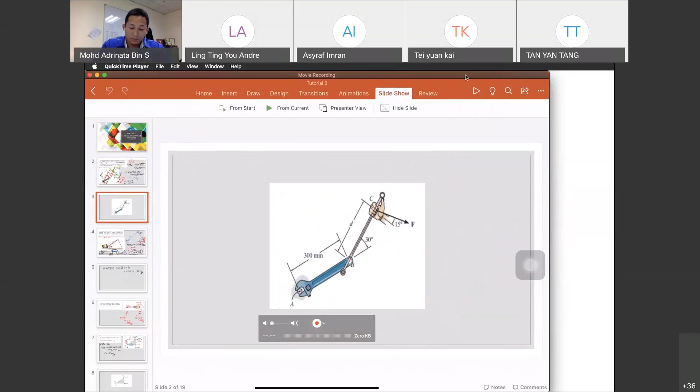120 Newton meter to tighten the nut A. So A, we have A is the nut. This is nut A, and then this is bar BC.

So the question is, where's the question? Extension D. So the bar BC, D is 300 mm. Determine the required force F in order to develop this moment.

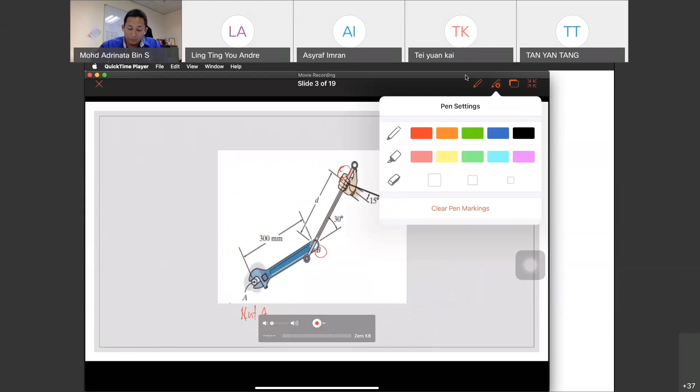Now what do you need for your moment? Your equation is M equals F times D. So you need the moment.

This is from the question, clockwise direction. So for clockwise direction, we just give it negative, because we assume that counterclockwise is positive. So this is moment, you have the moment, and F.

You have the F, but you need to separate the F. So there is your F, and then you need to find your D. So you have your F, but in F format, F1, F2, F3, okay?

And D, distance. So you need the distance. And F times D must be perpendicular, 90 degrees.

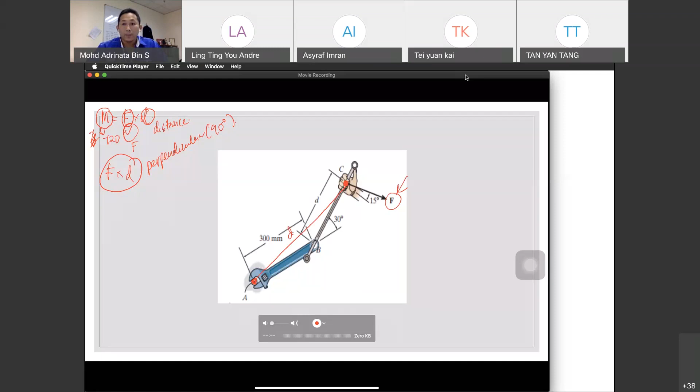From that, you need to find your D. How to find your D distance, and this is your point C. The first one, if you have an idea, from point A to point C, okay, that's the D. But what about our F, theta?

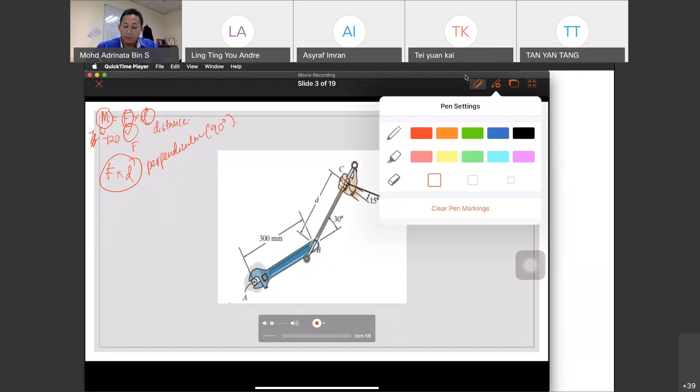Theta is not 90 degrees. Right, so they gave you from the equation, from the figure, this D, okay, D is from here, from B to C, that's the D. So you need to find the easiest way. From this question, you can use your point A and find the perpendicular.

For this F, we divide it because it is 15 degrees there. This is first one, and then we have the other point for C. So that one is our break of point, sorry, force.

So from that one, you can try to find your D, but it is not at point A. So we need to define our distance. Remember, distance must be 90 degrees.

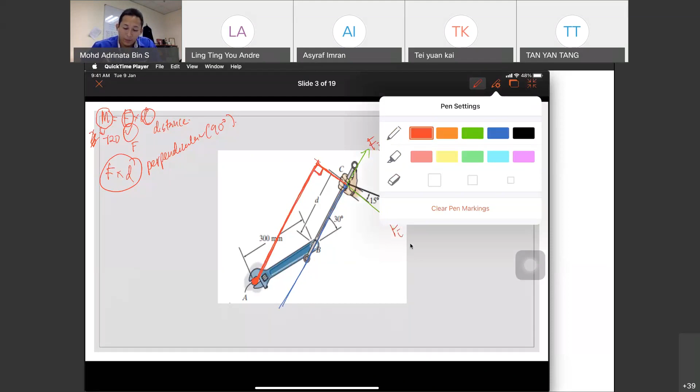So it is the line for Fi that is perpendicular. What happened to our Fj? For Fj, this is the line of force. And what is the distance that is perpendicular to our A? This one. So this is for dj, and this distance, the red one, is for di.

Okay, that's the first one. So you need to find the perpendicular. Okay, so this is dj, this is 90 degrees, and this is your di. Okay, so this is for Fi. So this is 90 degrees. So you have two distances.

Okay, di and dj. So you need to find di. What is di? Okay, so we separate our line. Okay, for the distance we have, this one is one thing. Okay, so this is D, rectangular, so this is D. And the other one is, we have this one.

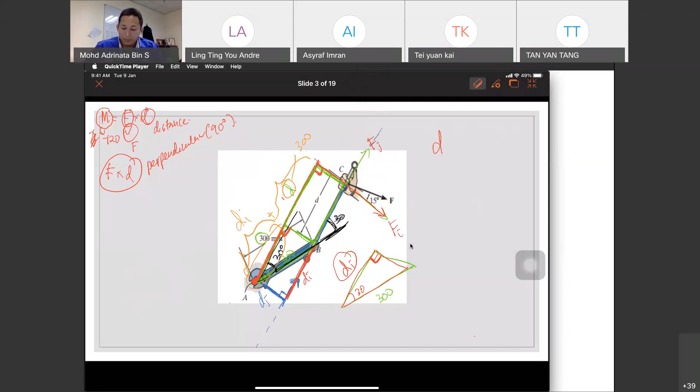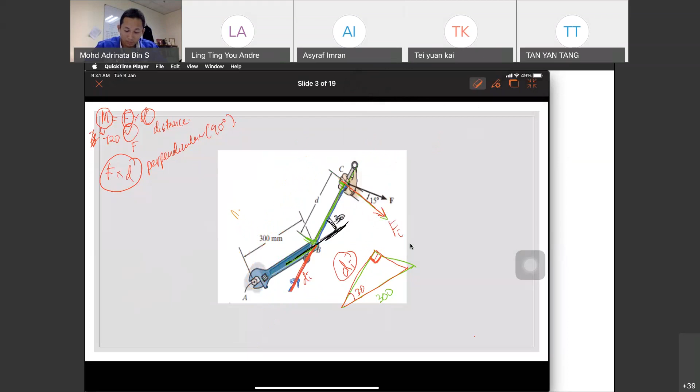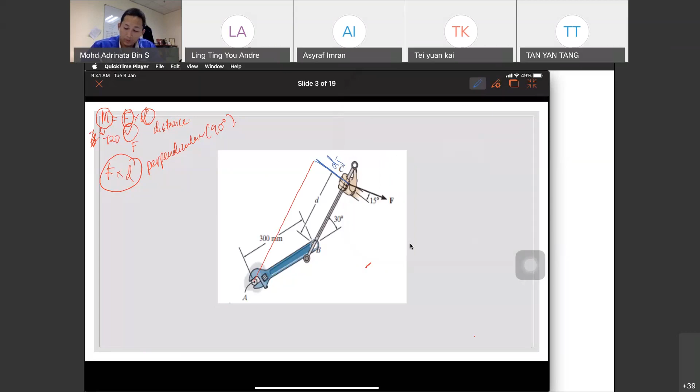Okay, after I explained that M is equal to FD, okay, so we want to find our D, okay, this is for D, this is for DJ, the distance for DJ, and this is for DI. DI is equals to D plus E.

So this one, we separate it by 2. Okay, so this is, the first one is D. D is equals to 300. And then this one, we separate it into a triangle. And this one, we have this one here, 300. So we have our triangle, 300, 30 degrees. So this is DJ, this is E.

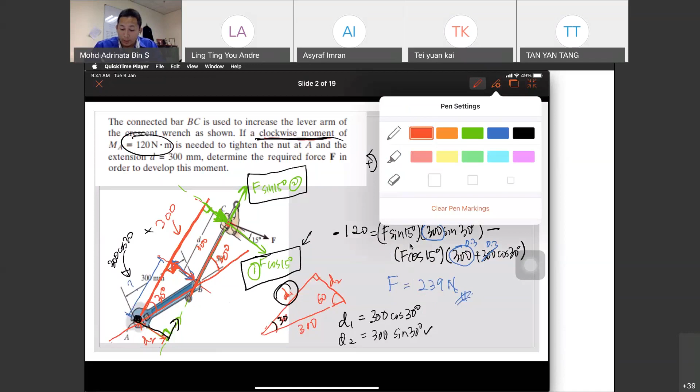So that's why in the equation, okay, I'm using this one. Okay, that is this one and this one. So both are the distances for Fi.

Okay, so that is distance. So you need to find your F and you need to find your D, and make sure that D is 90 degrees. Okay, so that is for D. That's all the question someone asked before.

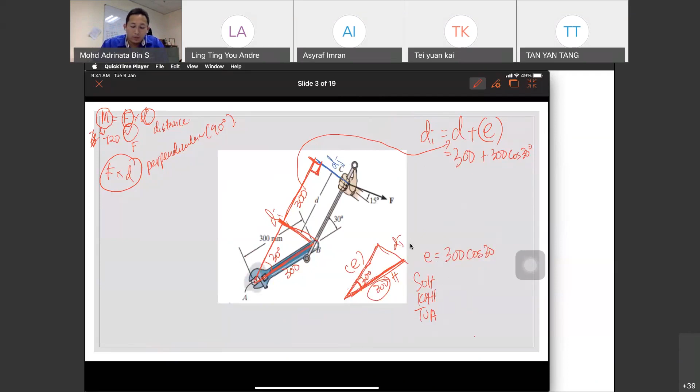Okay, so for the solution, okay, so we take sigma MA, and then we have I, okay, and we have J. Because I said that, okay, so this is for F times D for I, and this is F times D for J. So we get our F when we solve the equation.

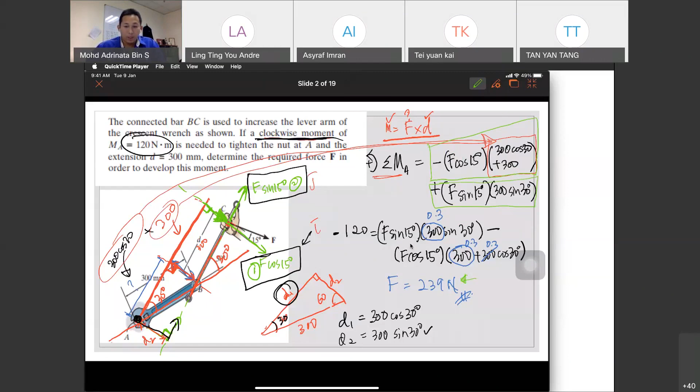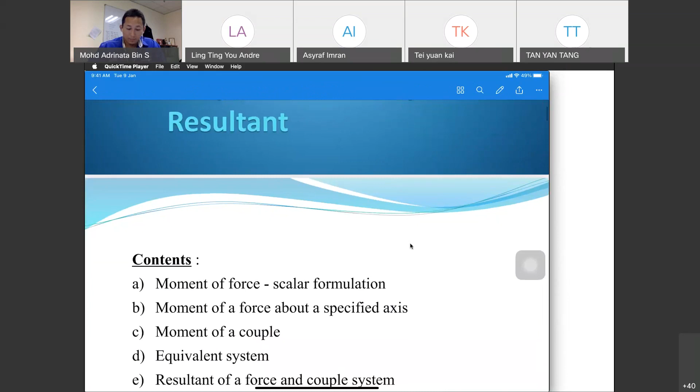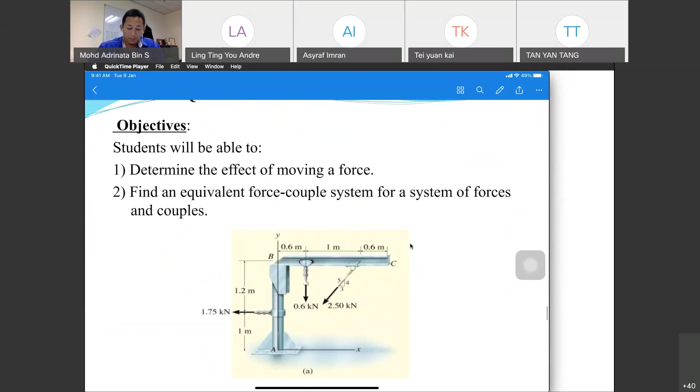Okay, this is in the lecture. So this is a normal couple, and then the last one, a couple. Okay, this is the equivalent system from the lecture.

When a number of forces and couple moments are acting on a body, we assume the body. It is easier to understand their overall effect on the body if they are combined into a single force and couple moment having the same external effect. So we need to combine the force and find our moment.

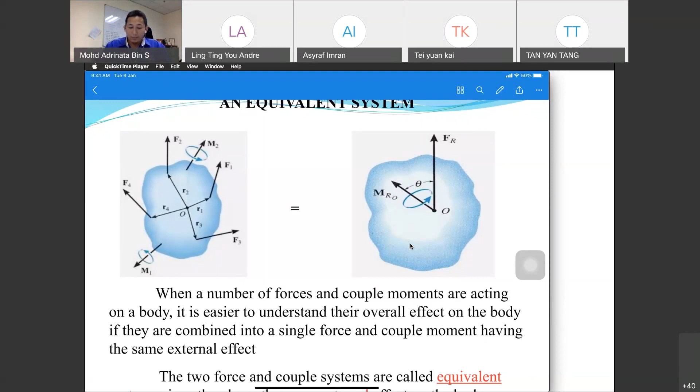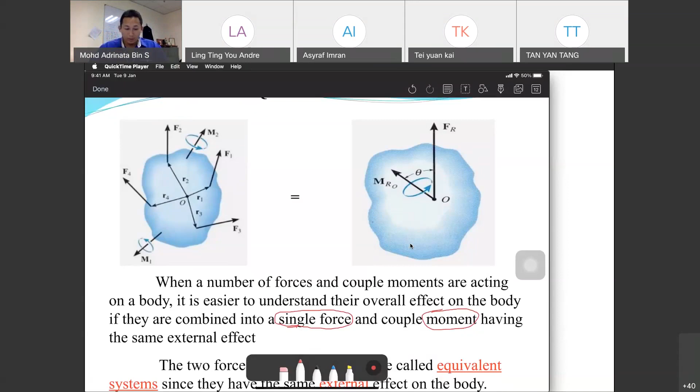So we get a single force. Single force is the resultant force with theta. Okay, and we have moment. When we move our force, there will be a moment. The two force and couple systems are called equivalent system.

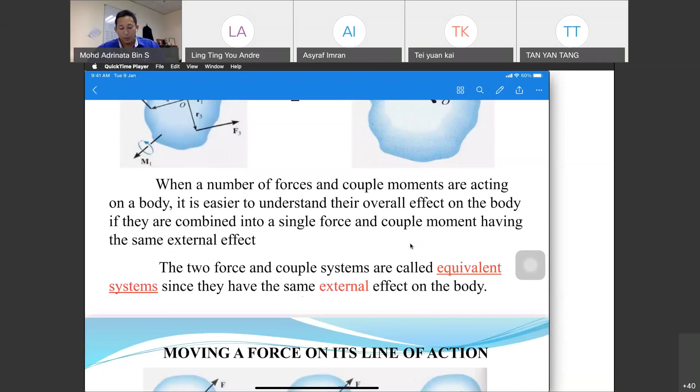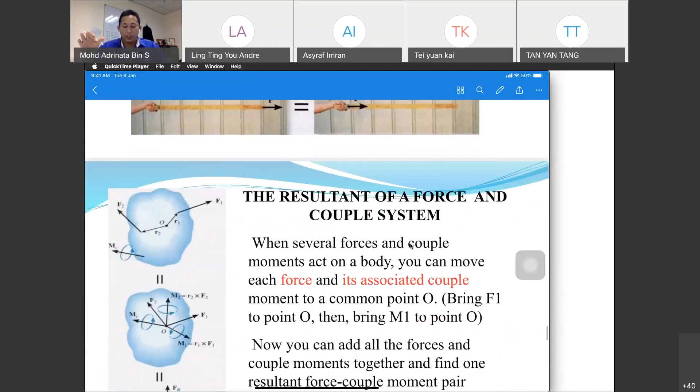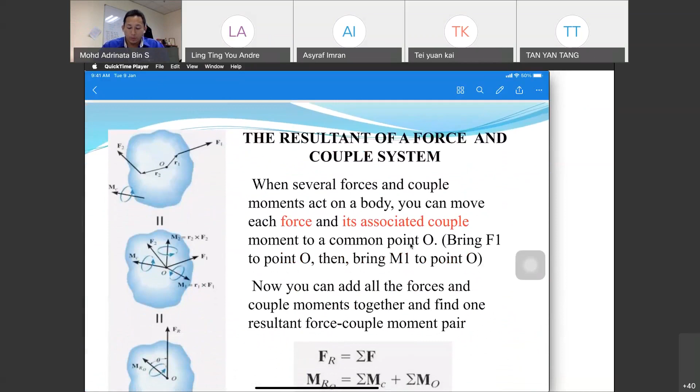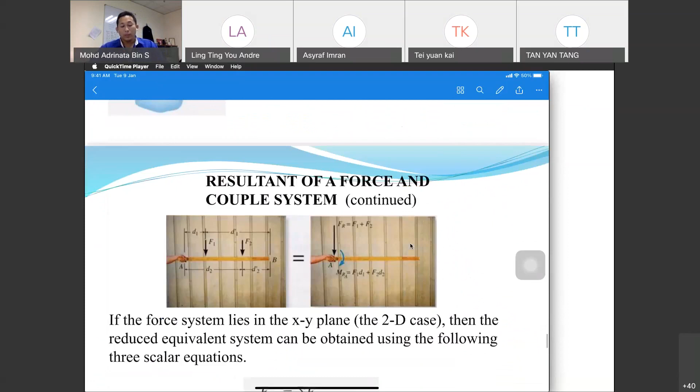So we want to find the equivalent since they have the same external effect on the body. This is for a sliding line, but if we move it there will be a moment. You can move each force and its associated couple moment to a common point O. Bring F1 to point O, then bring M1 to point O. So we want to get the resultant, equivalent force for the body. So that's why we found the force and moved it to one point O.

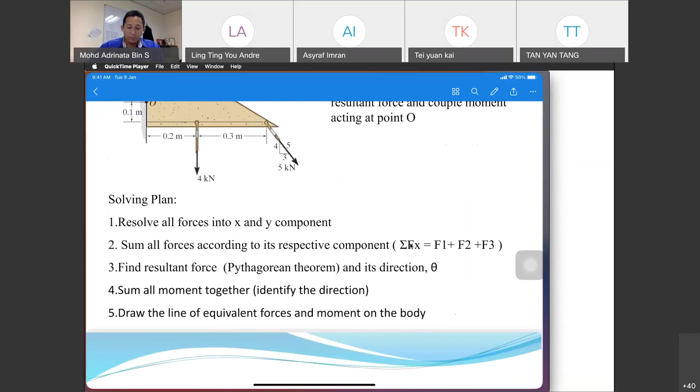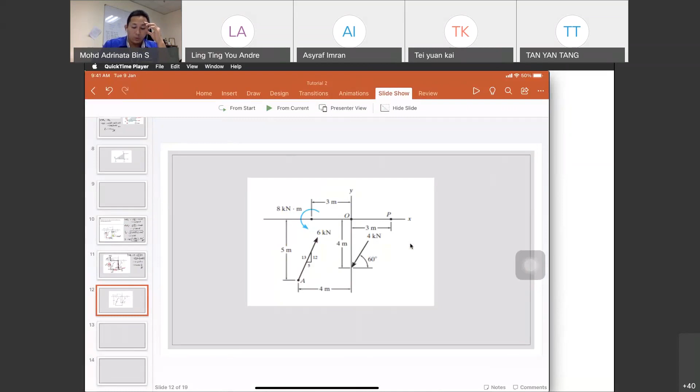So that's why for question number 5, okay, we have two forces and one moment. So we want to look at point O, okay, so what is our resultant force, okay, and also our moment.

So when we look at point O, we need to move our force. When we move our force, this will be the resultant force. When we move the force, it has a resultant force and it will produce a moment. So for that moment, use this one, moment, for our calculation.

So this is a pure moment and this is the force that we move with the distance D. This is force and this is D, distance. This is force and this is distance. So force, another one. The resultant of the moment is the other one.

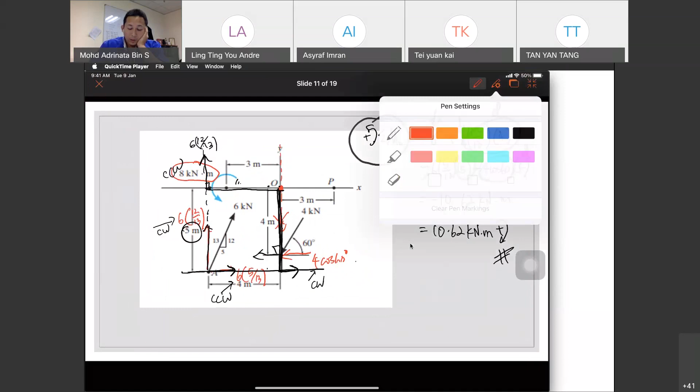Alright, so for the question, there are several people who got it right and understood when I said that counterclockwise is positive, clockwise is negative. Okay, I have written here counterclockwise. So this one should be positive and this one should be positive. So for clockwise, it will be negative, it will be negative.

So we have four forces, three forces with one moment. Okay, so this 8 kilonewton is positive, counterclockwise. But for 6 times 12 over 13, this one is clockwise direction, so it should be negative. And the other one is counterclockwise positive, so this one should be positive. And finally we have clockwise negative and this one is negative. Circle that one, okay, so this one is wrong.